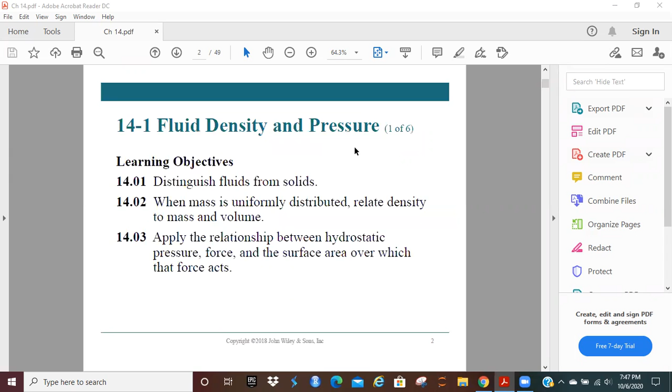The physics of fluids is going to be the basis of hydraulic engineering. Fluid is a substance that can flow like water or air and conform to a container.

This occurs because fluids cannot sustain a shearing force, something that's tangential to the fluid surface. They can, however, provide a force that's perpendicular to the fluid surface. So if you think about a body of water, like a lake, there's no force the fluid can exert that is tangential, in other words, parallel to the fluid surface. It just doesn't happen. But the fluid can start exerting a force on things that are below it.

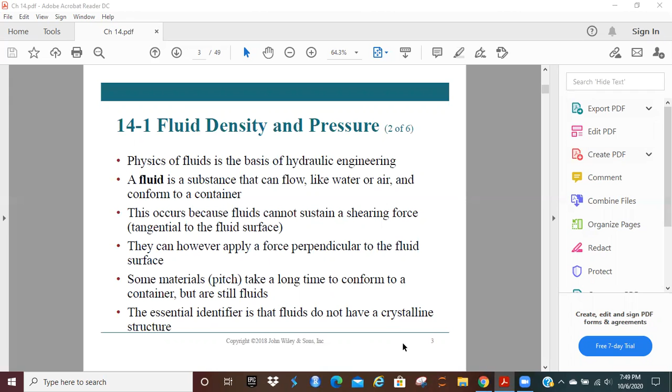Some materials like pitch can take a long time to conform to a container, but they're still considered fluids. The essential identifier is that fluids do not have a crystalline structure. You're not going to see that. I mean, you see that in solids, and this is something that's not present in a fluid substance.

The density of a fluid is going to be defined as the change in mass over the change in volume. In theory, the density at a point is the limit for an infinitesimal volume, but we are going to assume that a fluid sample is large relative to the atomic dimensions, in other words, the material that makes it up, and therefore has uniform density. So we're just going to say that the density is the same as the mass over the volume.

Density is going to be considered a scalar quantity. In other words, there's no direction associated with it. The units, generally, you're going to find are kilograms per meters cubed.

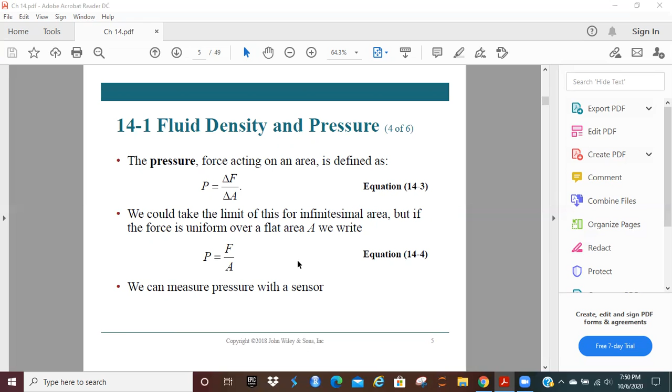The pressure of a fluid is going to be the force acting on an area, and it's defined as the change in the force over the change in the area. We could take the limit of this for an infinitesimal area, but if the force is uniform over a flat area A, we're going to write that the pressure is the force divided by the area. And we can measure that with a sensor.

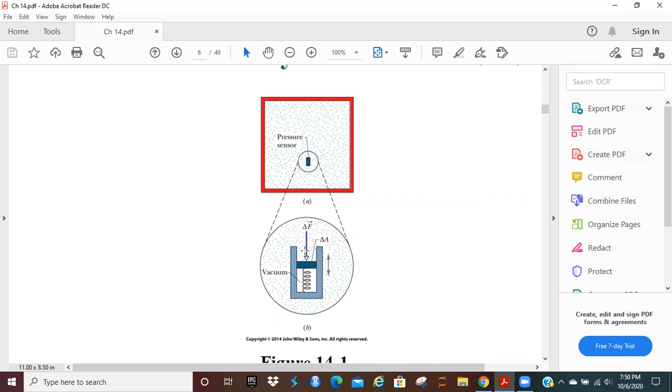Let's zoom in on this a little bit. So we've got our sensor here, tied to a spring at the back end of it. The fluid surrounding this particular sensor is going to have a force applied onto this particular area. So that's how it's measured.

We find empirically that for a fluid at rest, pressure has the same value at a point regardless of how the sensor is oriented. So that's why we consider static pressure to be scalar, even though force is a vector quantity. Only the magnitude of the force is going to be involved.

The units are going to be the Pascal, which is defined as 1 Newton per meter squared. It can also be measured in atmospheres, in torr, which is the same as 1 millimeter of mercury, or as pounds per square inch, PSI. 1 atmosphere is equal to 1.01 times 10 to the 5th pascals, which is equal to 760 torr, which is equal to 14.7 pounds per square inch.

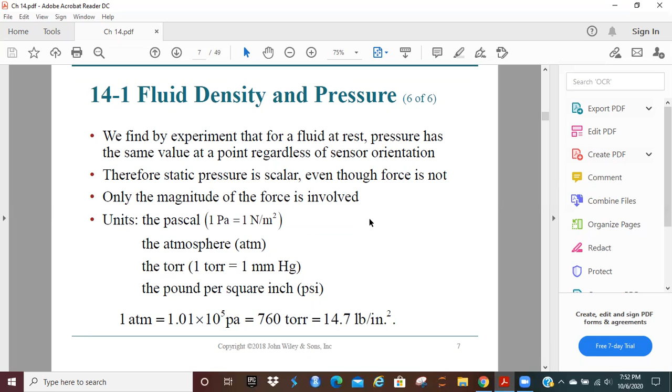Hydrostatic pressures are those caused by fluids at rest, such as air in the atmosphere or water in a tank.

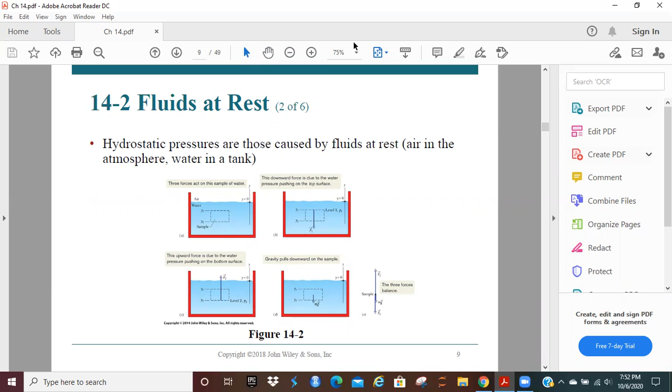So let's say you've got a section here in this sample of water, with air out here. This is defined as y equal to 0. And you're looking at a section that goes from y1 to y2. This is your sample, so you're going to have 3 forces acting on that.

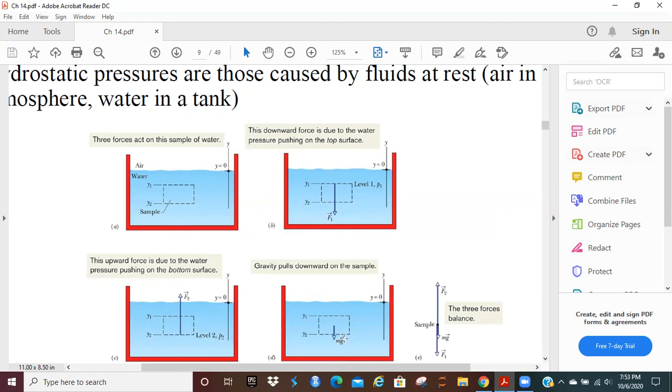The first is a downward force, due to the water pressure pushing on the top of the surface, in other words, all of the stuff up here pressing down. You've got an upward force due to the pressure on the bottom. And then you've also got gravity, which if you put at the center of mass is going to look like this. All 3 of those forces balance out.

If you were going to write how those forces are balanced, F2 is going to be equal to F1 plus mg. If you look at the free body diagram here, let's focus on that a little bit more. Force pushing up, F2, is going to be equal to the sum of those two.

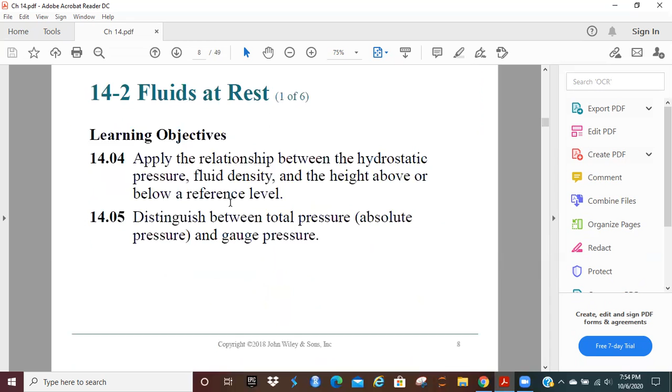If we're going to take that and rewrite it with pressures, this is what it's going to end up becoming. Remember that pressure 2 is going to be equal to the force divided by the area, so if you just want the force, you multiply both sides by the area, and that's where that term comes from. Just multiply both sides by A, and F over here is equal to pressure times the area.

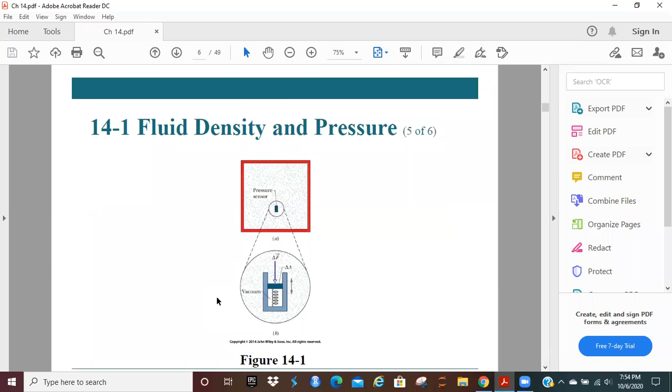Then over here, pressure times the area, and remember that the areas in both of these cases are going to be the same. Plus, now this is interesting, the density times the area times y1 minus y2 times gravity. Where did all of this come from? Well, the g's we're not going to compare, but the rest of this, density times area times this dimension, should be the mass. If we divide through by A, because it's the same all the way through, we find that pressure 2 is going to be equal to pressure 1 plus the density times gravity times the difference here.

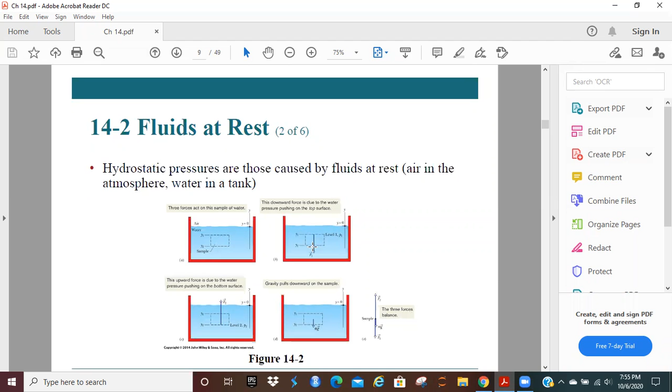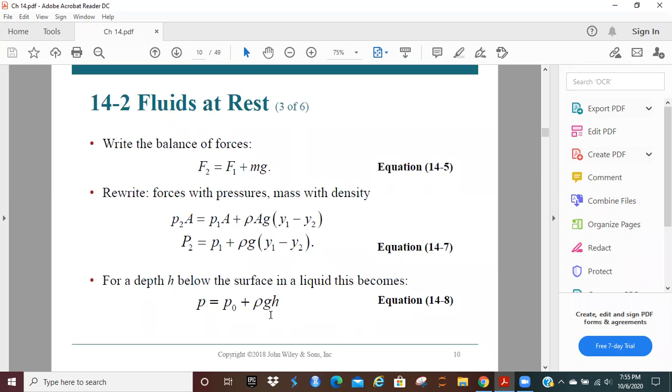For a depth h below the surface in a liquid, this becomes this equation. In other words, if we take y1 and raise it all the way up to 0, and we're going down a value of h, then y2, depending on how it's defined, would be h minus 0, or just h.

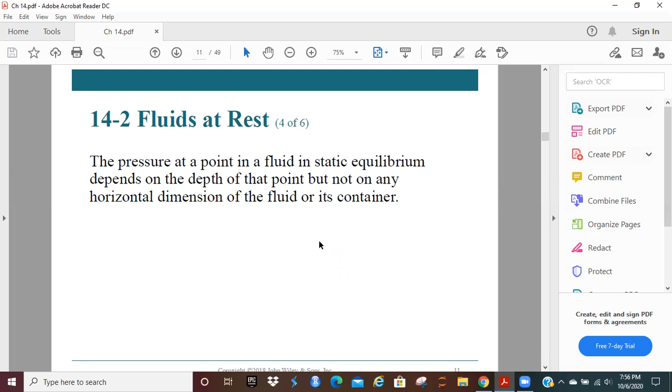The pressure at a point in a fluid in static equilibrium depends on the depth of that point, but not on any horizontal dimension of the fluid or its container. In other words, remember what we said at the beginning, that this is going to be a force that's perpendicular to the surface, not anything tangential.

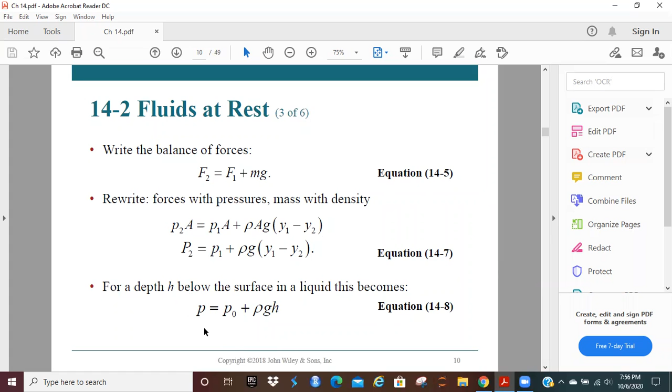So the pressure in 14.8 is going to be the absolute pressure. Let's see if we can find it. In other words, this pressure consists of P naught, which is the pressure due to the atmosphere, and the additional pressures from the fluid. The difference between absolute pressure and atmospheric pressure is called the gauge pressure, because we use a gauge to measure this pressure difference.

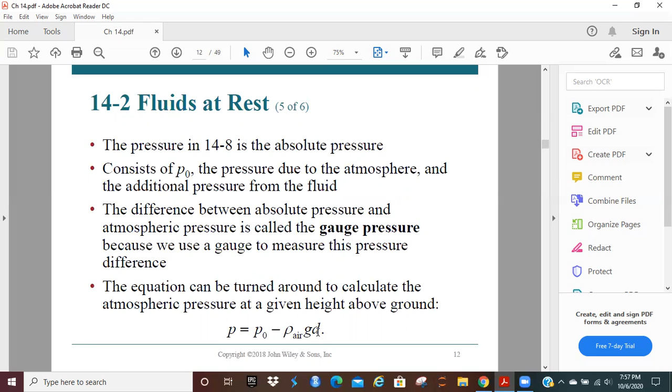The equation can be turned around to calculate atmospheric pressure at a given height above the ground. So you can see the change in the sign there. Instead of being submerged in a liquid, we're surrounded by air, and we're above the ground, so our pressure is going to decrease.

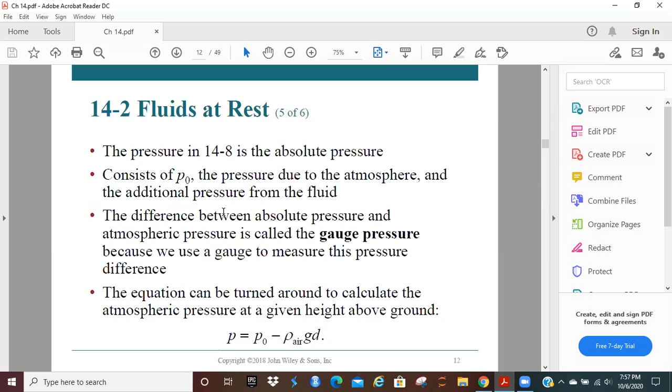The answer, of course, is that all the pressures are going to be the same. All that matters is the distance h from the surface to the location of interest, and h happens to be the same in all cases. If we go back and look at our equation, the pressure is equal to the atmospheric pressure plus the density times the gravity times h, nothing else. Since h is the same in all of these cases, it doesn't matter the shape.

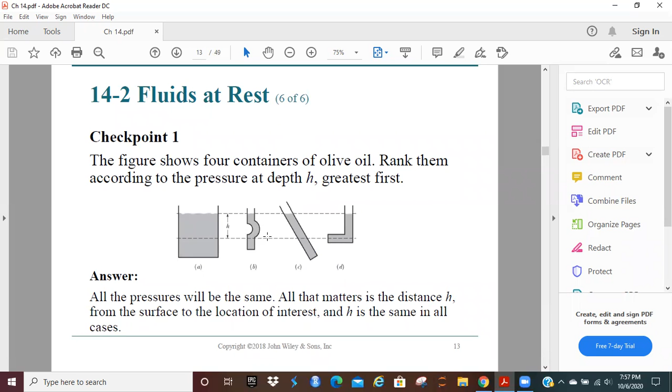So here's a figure showing mercury barometers. The height difference between the air-mercury surface interface and the top of the mercury level is going to be h. In other words, the pressure here is equal to the density times gravity times h. Again, the shapes here don't really matter.

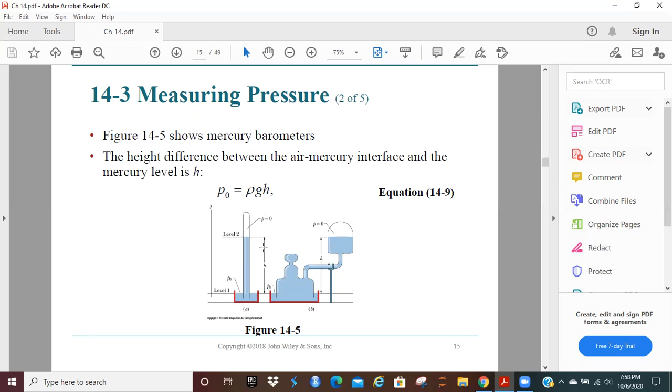The height of the mercury column is numerically equal to torr pressure only if the barometer is at the place where G has its standard value, 9.8, and the temperature of the mercury is 0 degrees Celsius. So it's pretty cold—well, cold to me, I live in the South.

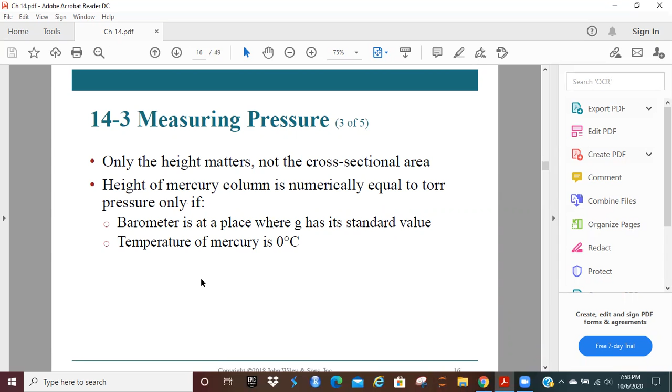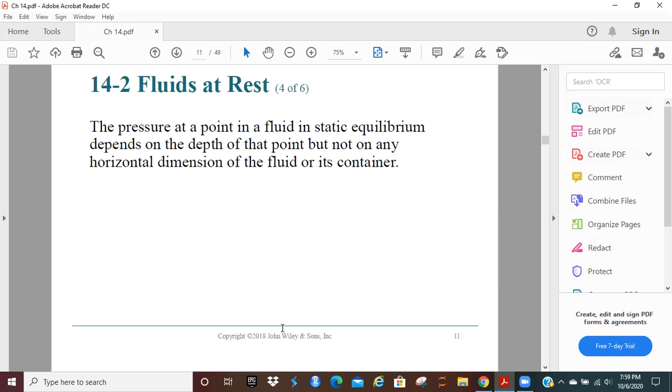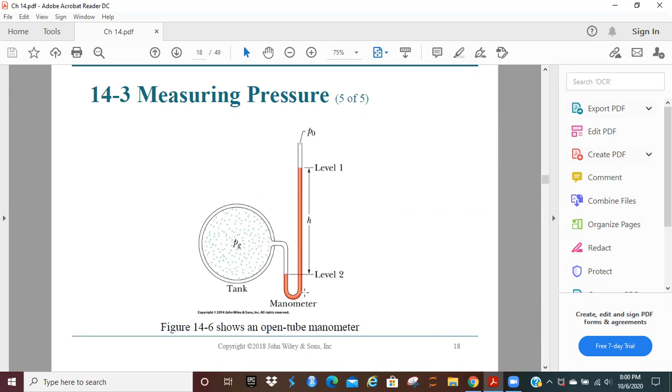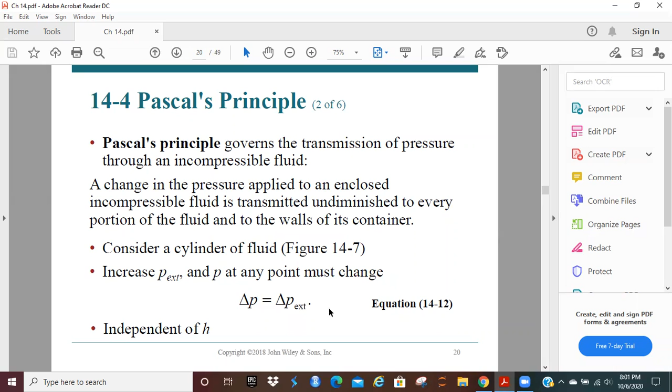If you increase the external pressure, P at any point must change. The change here is going to be the same as the change in the external pressure, and this is independent of the height.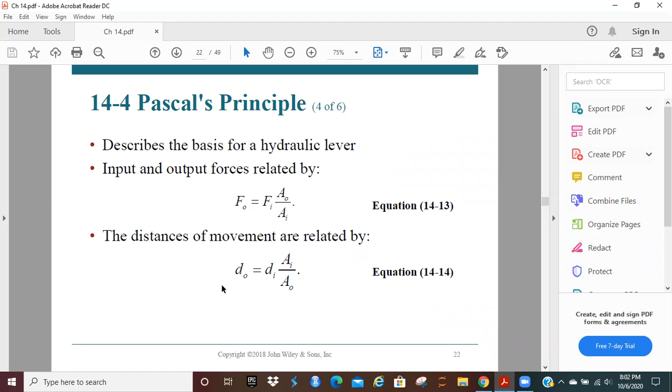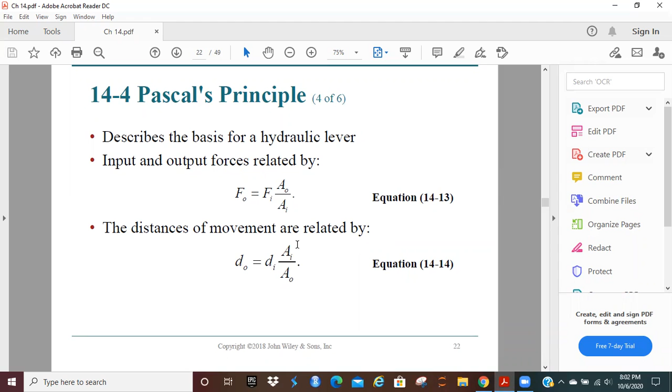Watch the difference here between that and the distance of movement. If you'll notice, the distance O and the distance I are in the same position as F of O and F of I. Well, watch what happens here—the areas invert.

What this means is that a small input of force here produces a large output of force here. However, you have to push a little bit longer distance here in order to generate that large output of force, and that output just makes a small change in the level. But it can be done. This is the same principle involved whenever you see your car being jacked up on a hydraulic jack—it's the same kind of principle here, and that's how it's able to lift those heavy cars.

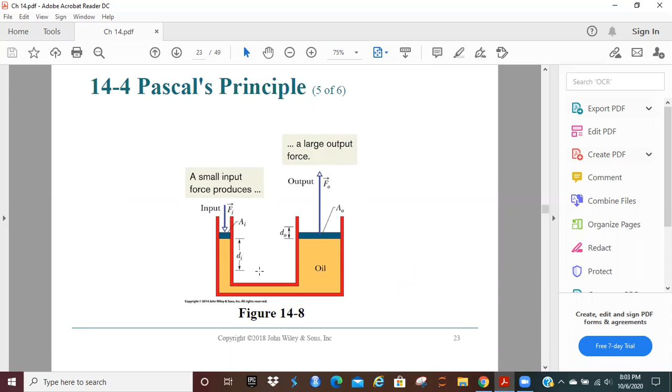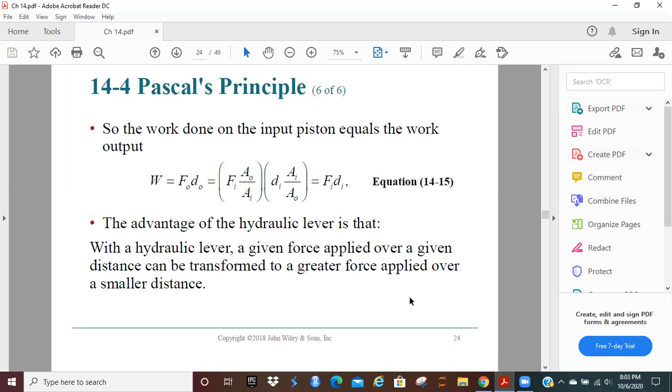So the work done on the input piston equals the work output. Work is force times distance, so FO times DO is the same as FI times DI. If you put in what FO equals and what DO equals, you can see where the areas cancel out, and this is what you end up with. So with a hydraulic lever, a given force applied over a given distance can be transformed to a greater force applied over a smaller distance.

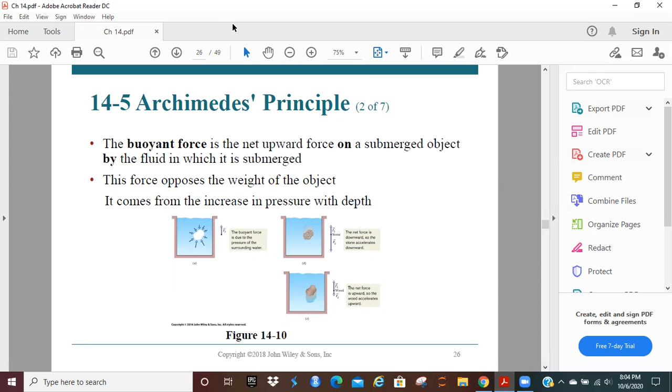If you've ever been in a swimming pool, then you have at least some idea of the feeling behind the buoyant force. This is the net upward force on a submerged object exerted by the fluid in which the object is submerged. This force opposes the weight of the object, and it comes from the increase in pressure with depth—the further you go down, the greater the pressure becomes. So if you take an object here, you take it out, what you are looking at here is the buoyant force, which comes from the pressure of the surrounding water.

Now, if you have an object such as a stone, where the net force is downward, in other words, the force due to gravity is going to be greater than the buoyant force of the molecules around it trying to push on it, that stone will sink.

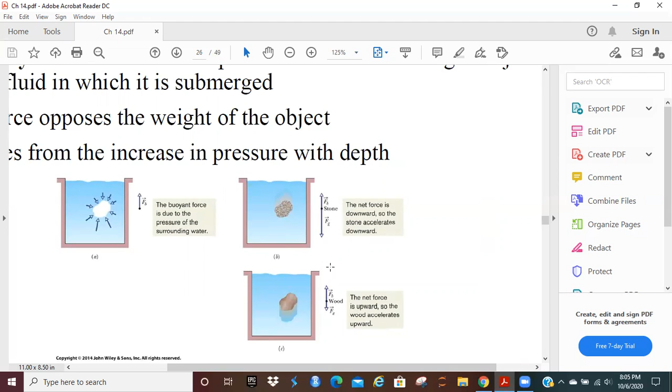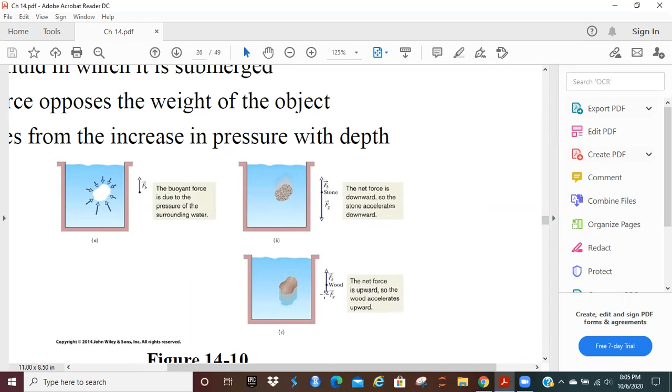However, if you have a case where the force of gravity pulling on this block of wood is less than the buoyant force, the force of the molecules pushing on it, this will go back up. It will float.

The stone and piece of wood displace the water that would otherwise occupy that space.

Archimedes' principle states that when a body is fully or partially submerged in a fluid, a buoyant force, or F of B, from the surrounding fluid acts on the body. The force is directed upwards and has a magnitude equal to the weight of the fluid that has been displaced by the body.

So the buoyant force has a magnitude F of B, or F sub B, which is the same as M sub F times G.

So a block of wood in static equilibrium is going to be floating. When a body floats in a fluid, the magnitude of the buoyant force on the body is going to be equal to the magnitude of the gravitational force on the body. So the buoyant force is going to be equal to the force of gravity.

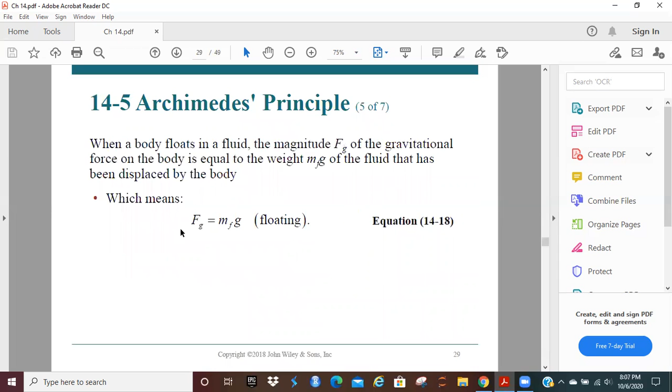So when a body floats in a fluid, the magnitude of the gravitational force on the body is equal to the weight of the fluid that has been displaced by the body, which means the force of gravity is going to be equal to the buoyant force, which is what we had defined here. So let's remember that going forward: when a body is floating, this is true, and this is true.

The apparent weight of a body in a fluid is related to the actual weight of the body by: the apparent weight is equal to the actual weight minus the buoyant force. So we're going to write this as weight apparent equals weight minus the buoyant force.

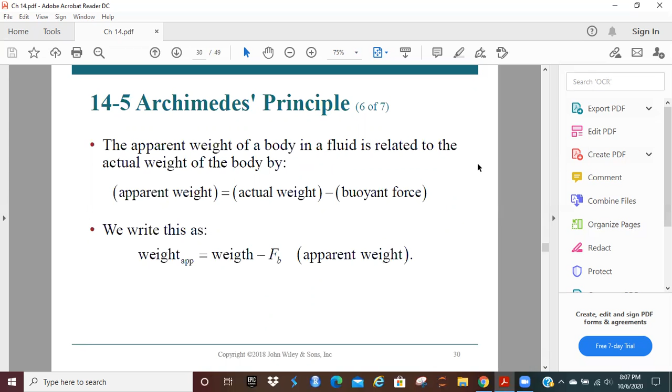So, checkpoint 2: A penguin floats first in a fluid of density rho sub 0, then in a fluid of density 0.95 times rho sub 0, and then in a fluid of density 1.1 times rho sub 0, the density at atmospheric pressure. Rank the densities according to the magnitude of the buoyant force on the penguin, greatest first.

If we're going to look at the magnitude of the buoyant force on the penguin, in each of these cases, the force there is going to be the same.

If we're going to rank the densities according to the amount of fluid displaced by the penguin, the buoyant force is going to be the same in each case, since the penguin is just sitting there floating with the same mass and same gravitational constant in each of those liquids. So the buoyant force is going to be the same all the way across.

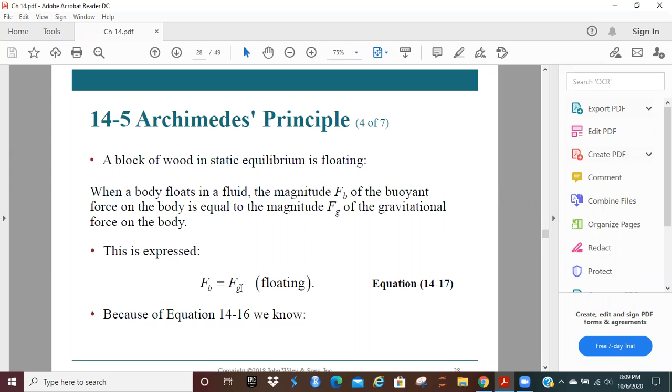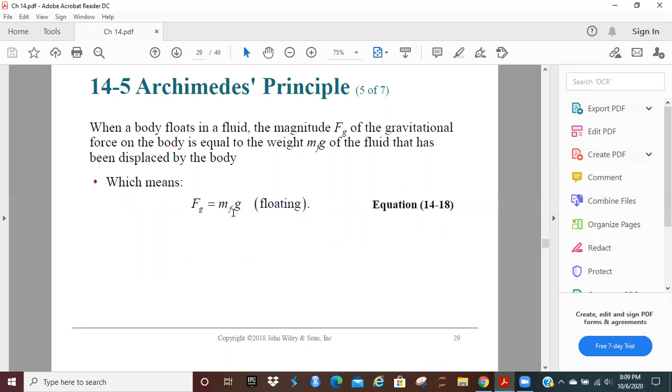The force of gravity is going to be equal to the mass of the fluid times gravity. Remember, the mass of the fluid is the mass that's being displaced. If we're having a particular density, the mass of the fluid being displaced has to be more here than in anything else, because this one is just a little bit less dense.

So that mass, or the amount of fluid, is going to be greatest here, followed by 1 times atmospheric pressure, and then followed by 1.1 times atmospheric pressure, because that one is more dense. And since the force is related to the mass, which is related to the density—density being equal to mass over volume—this one comes in last.

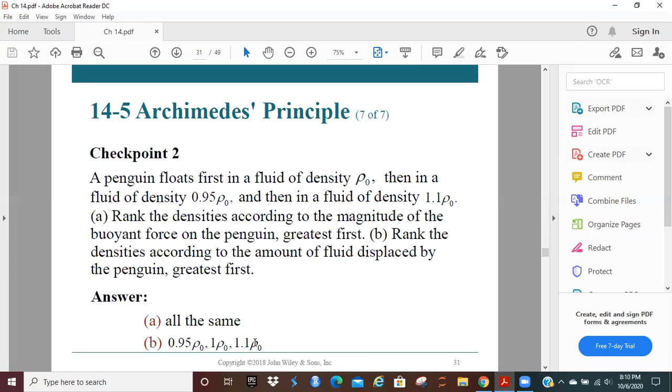Motion of real fluids is complicated and poorly understood. That's good to know. We're going to discuss the motion of an ideal fluid.

Laminar flow, or steady flow: the velocity of the moving fluid at any fixed point does not change with time. That's about as steady as it gets.

Incompressible flow: the ideal fluid density has a constant uniform value. In other words, if it were compressible, you would be able to squeeze the fluid in so that it had a greater density. You can't do that with an ideal fluid, or at least that's how it's defined.

Non-viscous flow. Viscosity is roughly the resistance to flow, and you can think of it as a fluid analog of friction. The point of this is that there's no resistive force here.

An irrotational flow may flow in a circle, but a dust grain suspended in the fluid will not rotate around the center of mass.

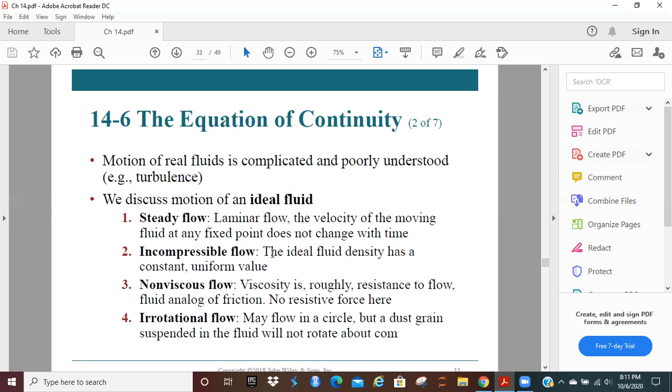So, visualize fluid flow by adding a tracer. In other words, you can't see the fluid flow unless you've got something in there that your eyes will detect. So we're going to add that tracer in there.

Each bit of the tracer, which you can see here, follows a streamline, much like this. The streamline is going to be the path a tiny element of fluid was going to follow.

Velocity is tangent to the streamline, so streamlines can never intersect. If the velocity of one streamline intersected the velocity of another streamline, it would mean that one particle would have two velocities, which is not possible.

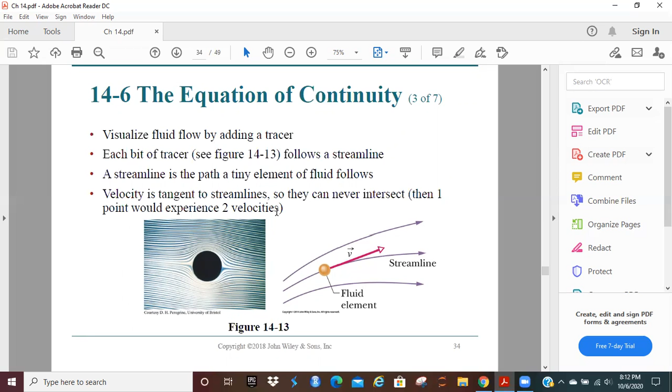So the fluid speed depends on cross-sectional area. Because of incompressibility, the volume flow rate through any cross-section must be constant.

So the equation of continuity means that the area at 1 times the velocity at 1 is going to be equal to the area at 2 times the velocity at 2. So when a velocity or an area changes, the other one will change as well.

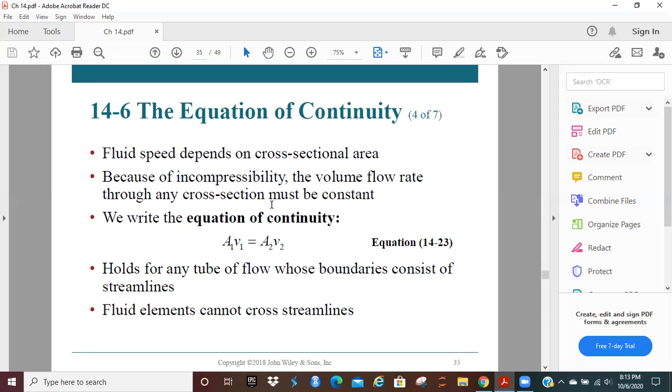This holds for any tube of flow whose boundaries consist of streamlines. And fluid elements, as we discussed, cannot cross the streamlines.

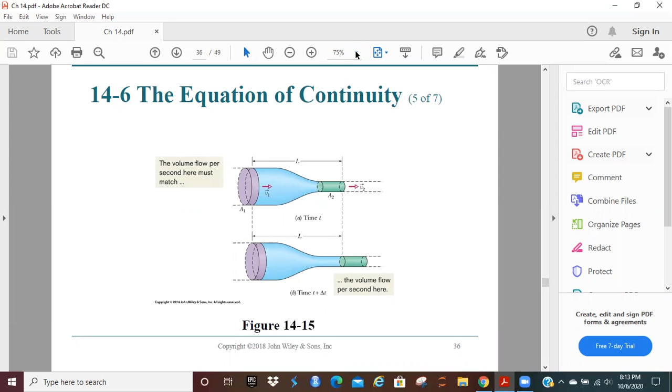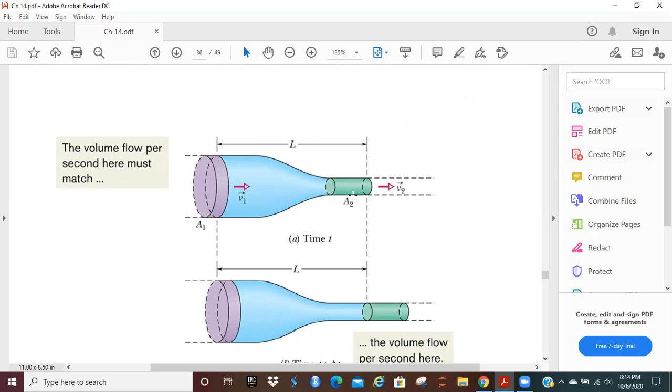So if we take a look at this particular diagram, the flow here through this larger area has the velocity described as this. The product of this times this is going to be the same as the product of this times this. The area has become quite a bit smaller, so you would think that the velocity would be a lot faster.

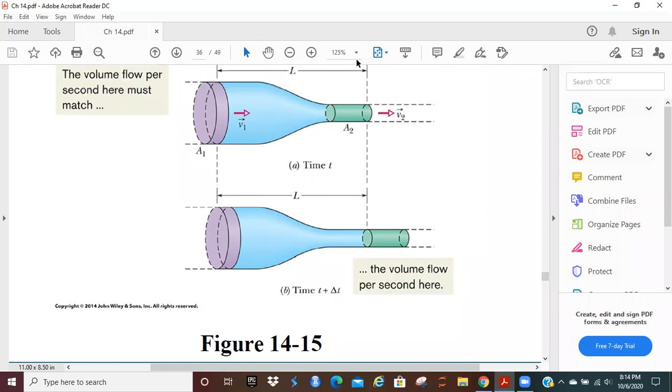We can rewrite the equation as R sub V equals A times V, which is going to be a constant, where R sub V is the volume flow rate of the fluid, or volume passing a point per unit time.

If the fluid density is uniform, we can multiply by the density to get the mass flow rate. So R sub M is going to be equal to the density times R sub V, which is going to be the density times A times V, which is going to be a constant.

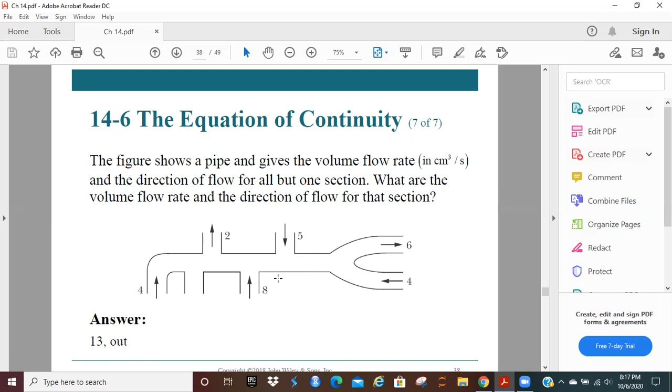And the direction of the flow — obviously, if we've got stuff coming out, it can't just be building up in here anywhere, it's got to go out somewhere, so it goes out here. If it didn't go out, like I said, we would be stuck with material accumulating within this device.

So figure 14.19 represents a tube through which an ideal fluid flows. We'll come back to this in a minute.

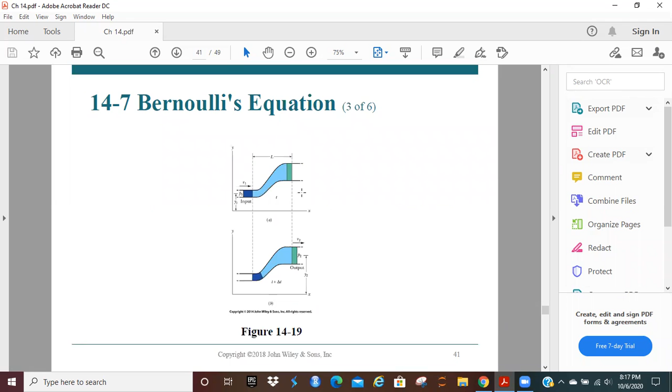If we're going to apply the conservation of energy to the equal volumes of input and output fluid, what we find here is that the pressure at 1 plus 1/2 the density times the velocity squared at 1 plus the density times gravity times the height y1 is going to be the same as the sum of all of those at point 2.

As you might have guessed, this term right here is going to be called the fluid's kinetic energy density.

So let's take a look at a zoomed in part of this particular graph. We've got velocity going through here, we've got pressure here, we've got y sub 1 here, we've got y sub 2 over here, got the velocity 2 here, and this is after a certain amount of time.

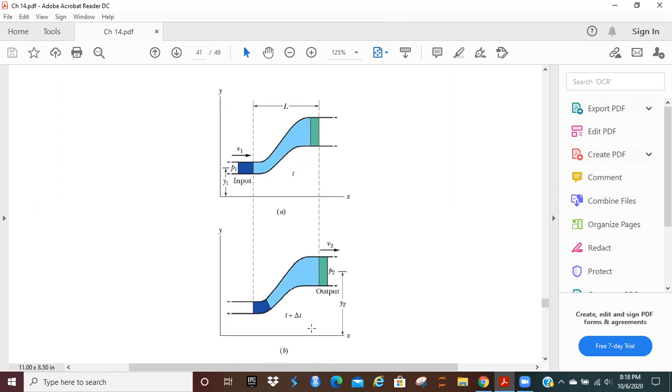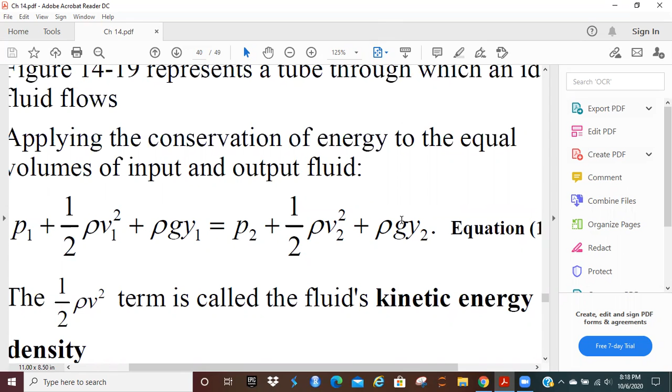This is where we started, this is where we ended up. What you're going to see is that these figures right here, we're going to have the same amount on each side.

So equivalent to 14.28, which is what we've got here, then we can write one side as a constant, and this is going to be considered another form of Bernoulli's equation.

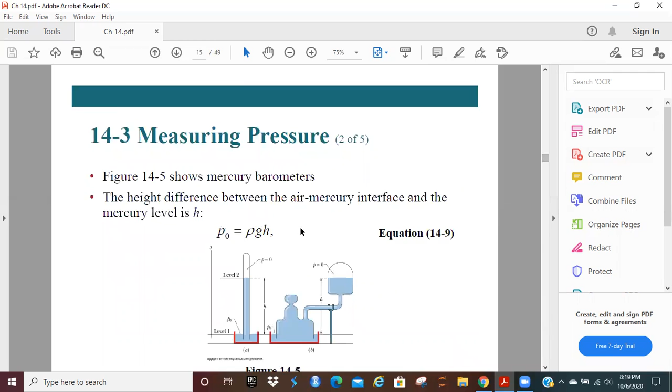So if we're applying this for a fluid at rest, we find equation 14.7. If we go back to 14.7, applying it at rest, this is what we come up with.

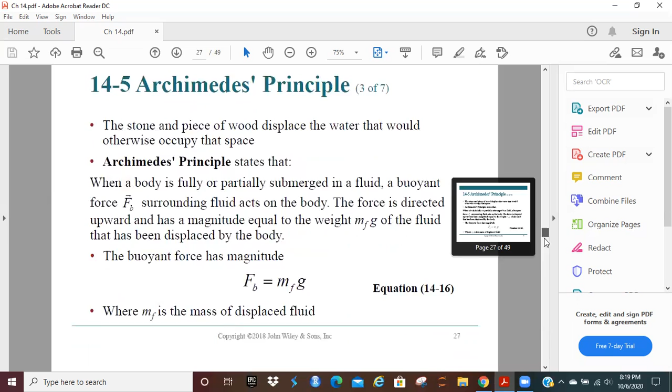Applying this for flow through a horizontal pipe, in other words, y would be equal all the way across, this term drops out and we're just left with the kinetic density energy plus the pressure.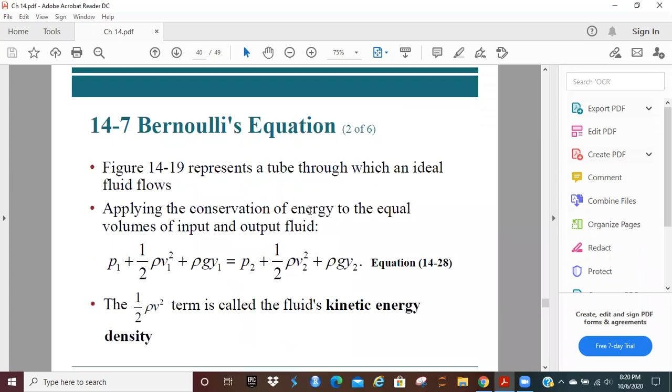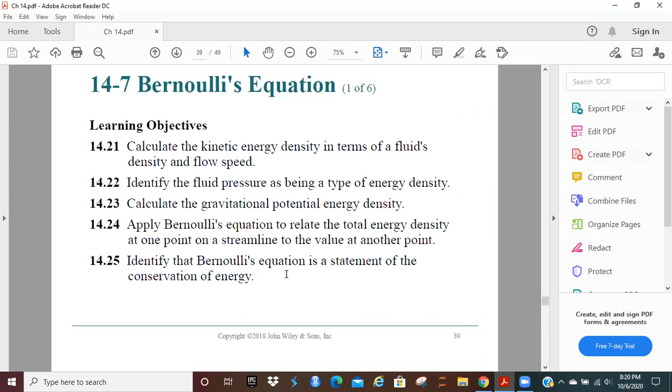If we look at the volume flow rate, it's going to be a constant, and it doesn't matter where we are in this. So because of that, all are going to have the same volume flow rate. Doesn't matter where we are.

For part B, the flow speed V through all of them as we go from 1 to 2 to 3 to 4. And here's part of the reason why.

But as that area increases, you're going to see that pressure start to increase and the velocity is going to decrease. That's why it goes from 1 to 2 to 3 to 4.

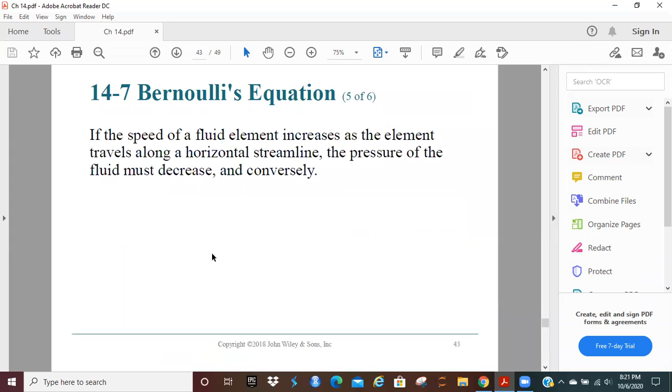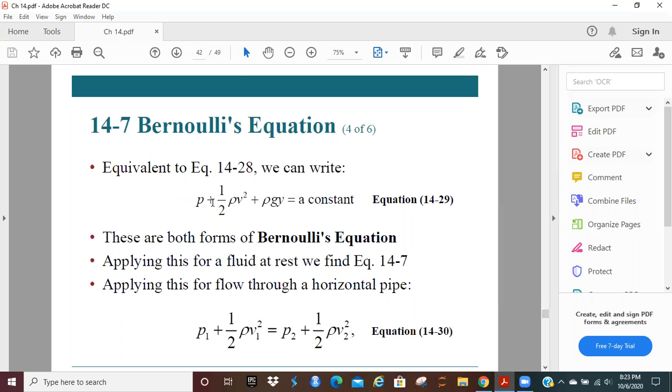So there's all the summary of everything that we've gone through. I hope this one was interesting. I found it interesting myself.